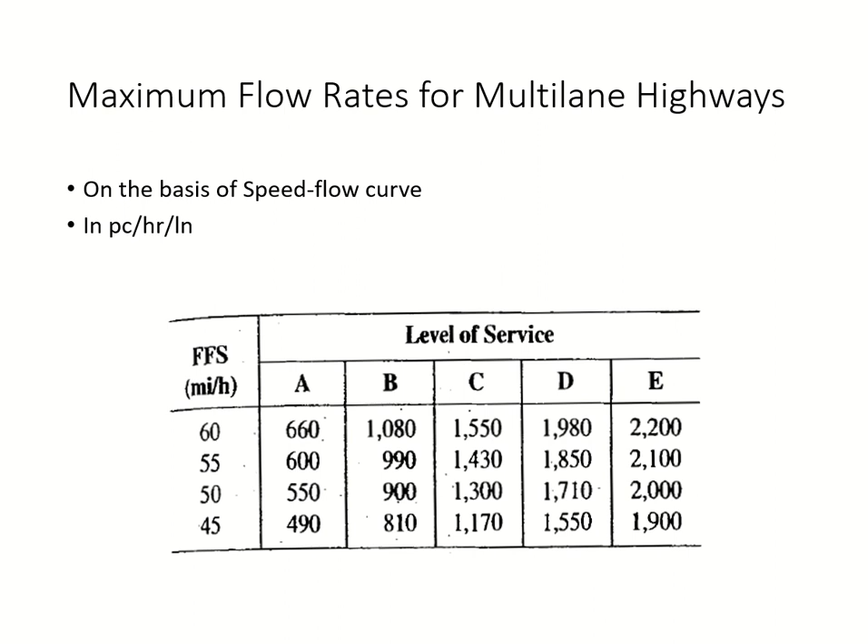Yeah, but if the free flow speed is not there, then you make your own curve. That's it. You have to make your own curve. For the curve, I already showed you: draw a line up to breakpoint. After breakpoint, draw the curve using this equation. Okay? What was your free flow speed? 86. How much is it in miles per hour? 86 kilometers per hour, how many miles per hour?

86 kilometers, how many miles? 53. Now, do you see a curve of 53 here? No. So you have to draw your own curve for 53. How do you do that? 53 is your free flow speed. This free flow speed is up to breakpoint.

So if your highway is a multilane highway, you will draw a straight line up to the breakpoint, and the breakpoint is 1400. If your highway is a freeway, you will again draw a straight line up to breakpoint, but the breakpoint is this one. Then how do I draw the curve? The minimum point of the curve is the breakpoint, and the maximum point is capacity. I have the equation for capacity, right? So I know the minimum point and the maximum point.

For example, your breakpoint is, let's say, 1400. So this value is 1400. Now let's say my capacity is 2400.

Okay, now I need a couple of more values between 1400 and 2400, and to put in the equation I will find out the speed and I can plot the curve, right? This is just a matter of choice. For example, I select a value of 1500 and I select a value of 2000. So I'll find out the speed at 1500, I'll find out the speed at 2000.

Now I have 4 points. I can plot the curve, right? So this is how you plot your own curve. Clear? And why are we plotting our own curve? I already have these. Why are we not using these? Free flow speed is not matching. Okay.

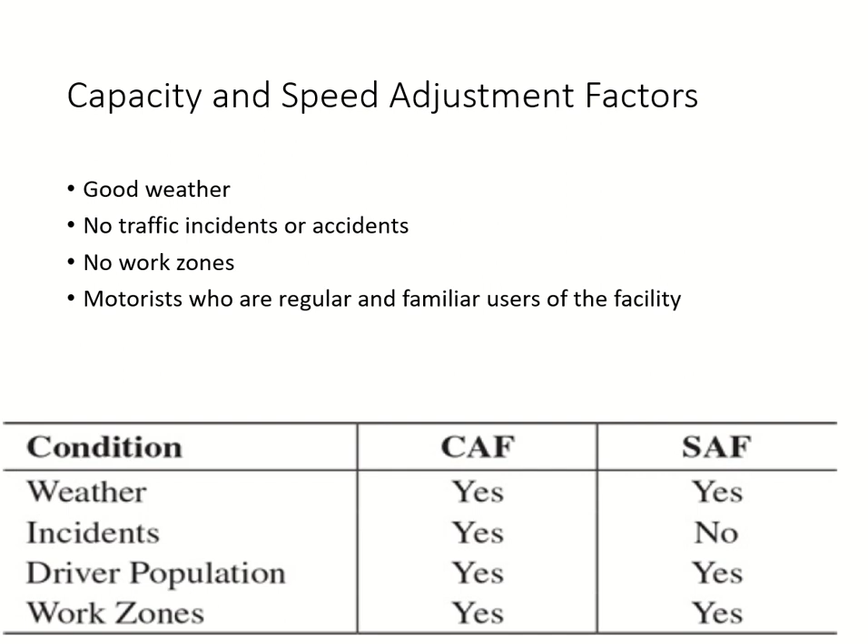Now, I told you there are 4 reasons for adjustment factors. How many adjustment factors do you see here? 1. And how many here? 1. So I need to combine those 4 into 1. How do we combine them? We take their product, meaning we multiply. So if you have 3 adjustment factors, multiply all 3 of them and you will get the final value. So CAF is the product and SAF is the product of all the adjustment factors. Take it for each reason and multiply them.

So somebody says we had very high rain. Why? Because our parking was full of water. According to us, it's high rain. Somebody comes from Malaysia and says, oh, I can just fill a bucket here. So what does high rain mean, not subjectively, but in number? It's not based upon judgment, where you say high rain and he says medium rain. No, we have a number for each one.

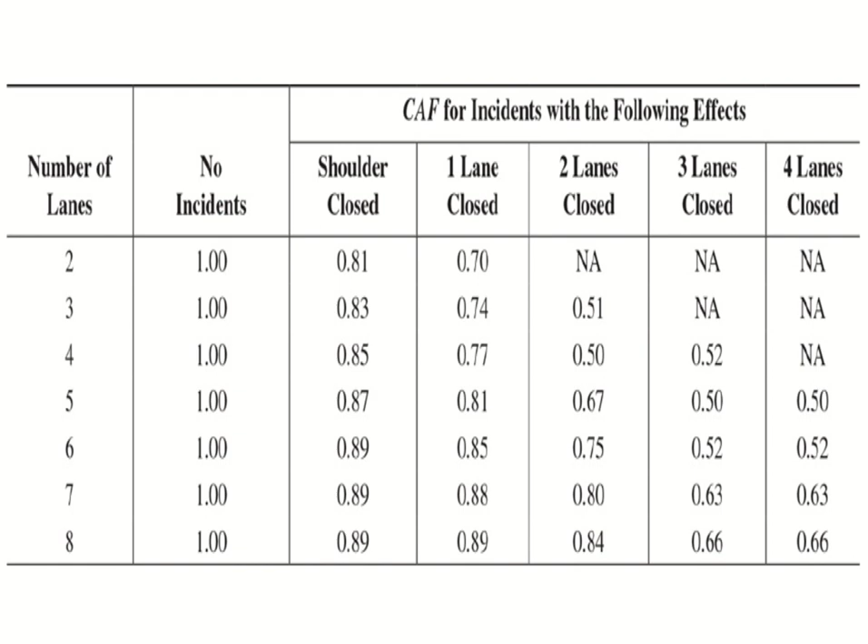Small. Huh? Look at the number of lanes, you get your answer. Oh, it's only 2 lanes. How can there be? You have 2 lanes. 2 lanes blocked. There's nothing now. Road is blocked. No capacity, no factor, no speed. Okay, clear? And obviously with 2 lanes, 3 cannot be blocked. So the NA values are for those number of lanes which are either not possible or they mean that the entire road is blocked. So 2 out of 2 is blocked, that means the road is blocked. And 3 out of 2 cannot happen.

So the only thing which is left is the work zone, the factor for work zone. The factor for work zone doesn't have a table, we need to do some calculations. So there will be some calculation for capacity adjustment factor because of work zone, and some calculation for speed adjustment factor because of the work zone. We are starting with the capacity adjustment factor because of work zone.

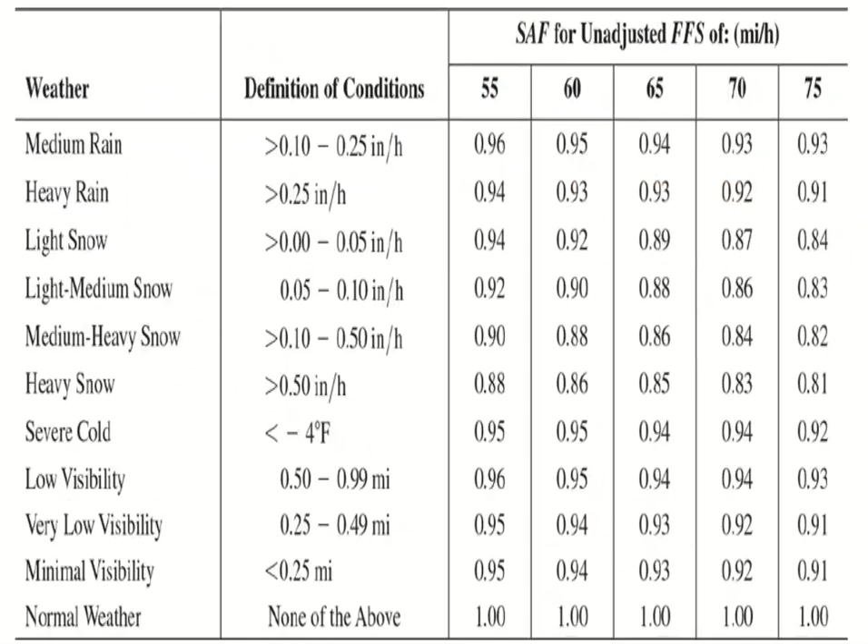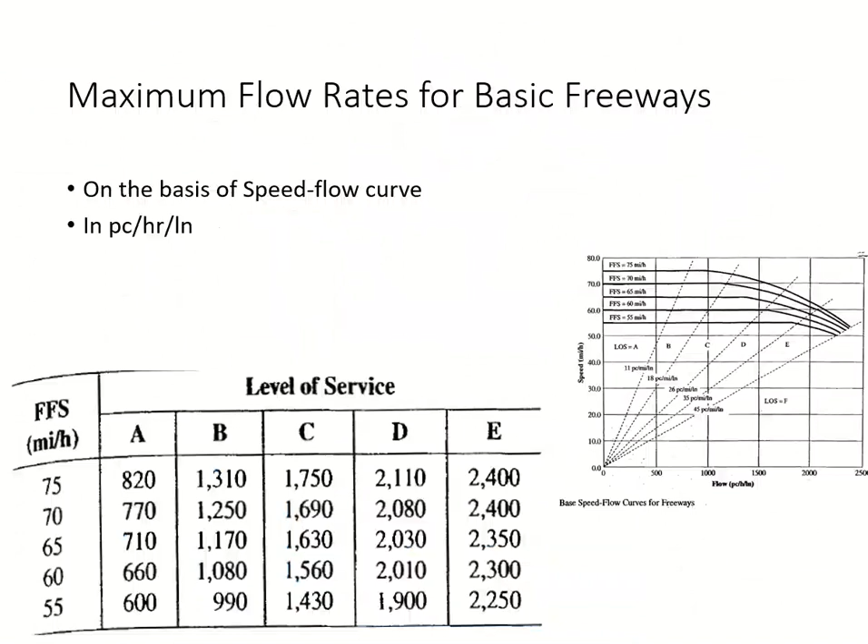The first one is FSR. FSR is a speed ratio. Speed ratio between what? Normal speed limit upon work zone speed limit. So normally when we start the work zone, we reduce the speed, right? We want the driver to go slower than before. Okay, so this is a ratio between normal speed limit and work zone speed limit. Got it? And SLWZ is the speed limit of the work zone itself. Okay, clear? So FSR is the ratio of normal speed limit and the work zone speed limit. And SLWZ is the work zone speed limit itself. Clear? Any questions?